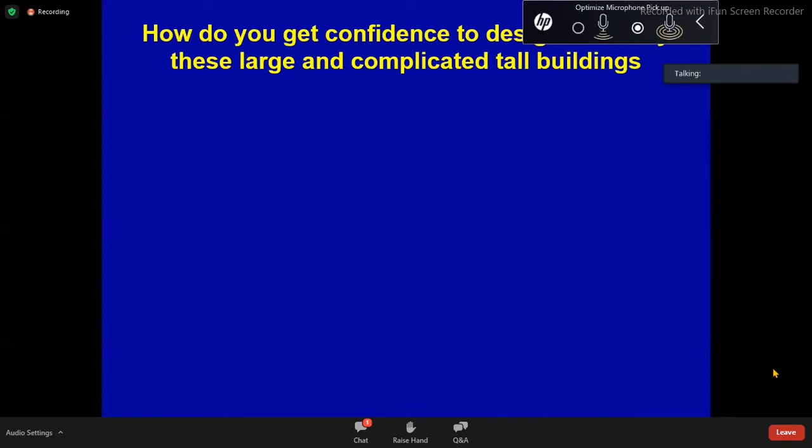And so how do you get confidence when you are designing tall buildings? Can you get confidence by just following Eurocodes or BS codes, or by developing a thorough understanding of fundamentals and theories?

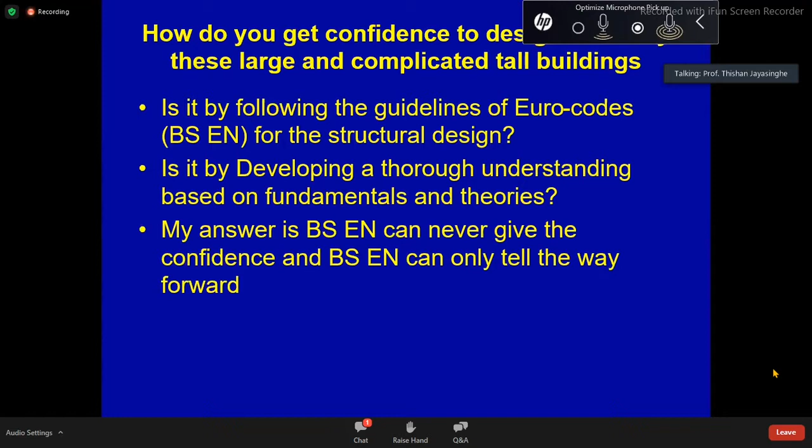The most important thing is you must develop a thorough understanding. Codes will help you, but they will never give you the confidence to sign and certify a tall building, especially very special shaped buildings like Altair. So if you want to certify, you must be thorough with your fundamentals, and that's why we always encourage our students to learn the fundamentals and then applications, rather than going directly into applications.

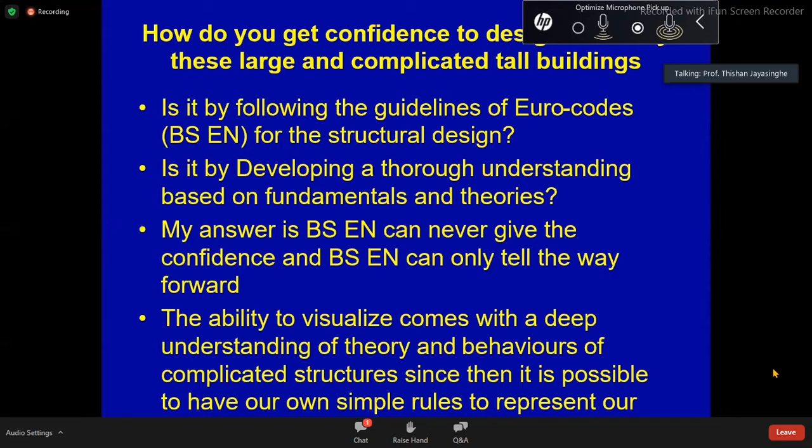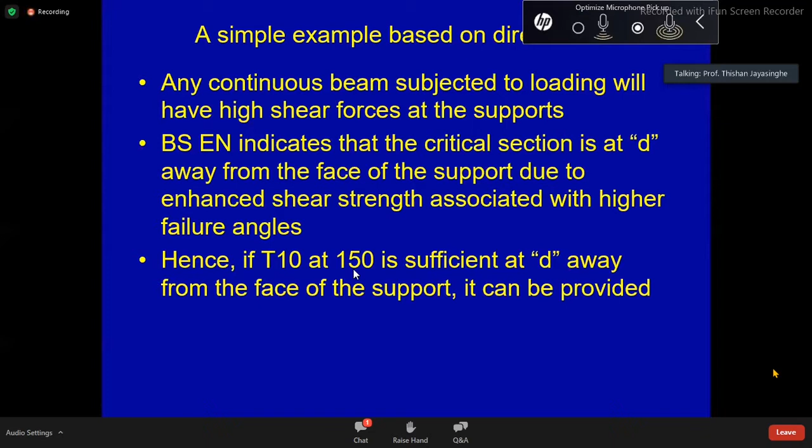I'll just take an example, and it's about direct shear. Any continuous beam subjected to uniform loading will have high shear at the supports. When you are checking for shear, the BS EN or Eurocodes allow you to check it at a distance d away from the face of the support, and then you can provide the same reinforcement up to the support. So if T10 at 150 is sufficient at a distance d away, you provide the same reinforcement within the face of the support and the depth d.

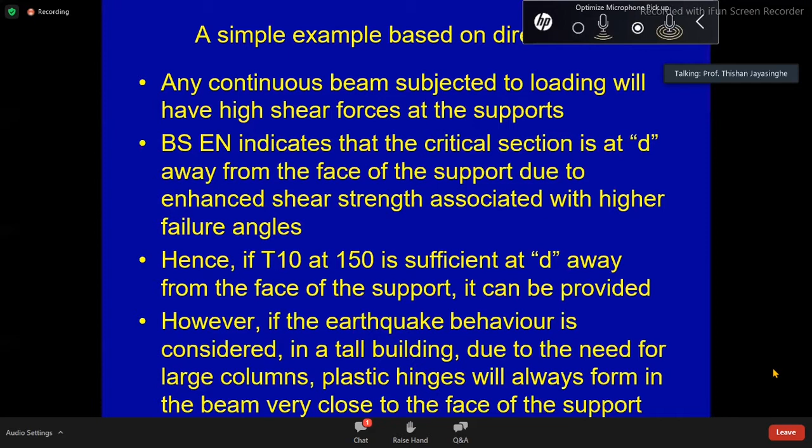But if you look at earthquake behavior, plastic hinges always occur very close to the face of the support. So if you just satisfy the rule given in Eurocode 2, you may not have a very safe building. You must look at Eurocode 8 as well, where you will look at the earthquake behavior, and then take the precautions that are given in that as well.

So basically, you have to have certain rules that have been developed by you. For example, if I am designing, I would not like to have a shear stress more than 2 newtons per millimeter square, because I know it's better to have a flexural failure than a shear failure. Flexural failure will always give us enough warning, whereas shear failure will give us less warning. So to prevent a shear failure, I know the maximum shear may be about 4.5, but if I keep the maximum shear stress less than 2 newtons per millimeter square, then the chance of shear failure is very, very remote.

Then if I am getting a high shear, I know the section I have selected is too small. That's why it's giving a shear failure. In a reinforced concrete structure, increasing the width of the beam by 50 millimeter or 100 millimeter will not carry a huge penalty. So it's worth increasing the width of the beam by 100 millimeter rather than having a very high shear stress.

So you can have various rules, and the reason is you have to always think which failure you would like to have, and then ensure that particular failure occurs in the structure when it is overloaded. And then you take additional precautions against whatever failure you would not like to have. Generally, I like beams failing in flexure because it always gives sufficient warning.

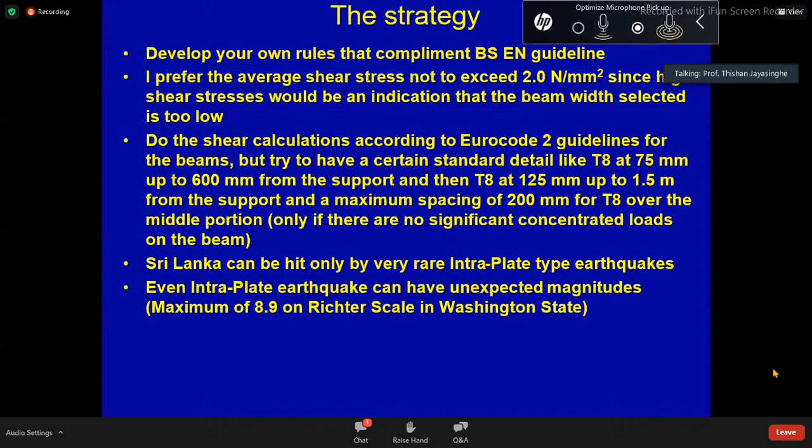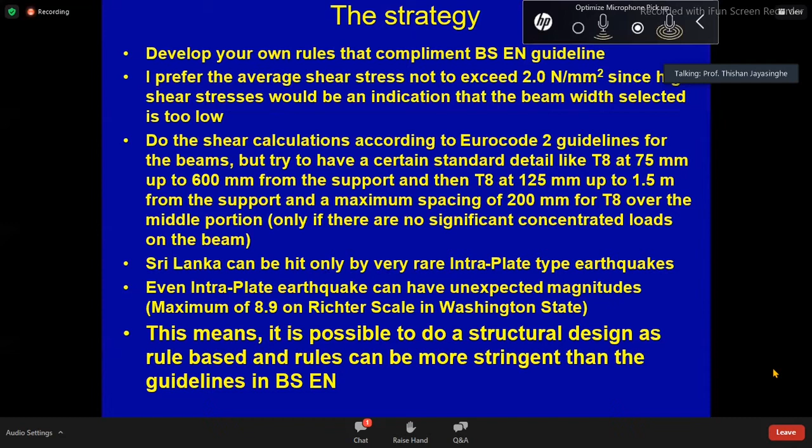So what you have to do is don't blindly follow the codes. Always develop your own rules, and then you can use codes and do the calculations. And if the answers that you get do not tally with your rules, you can always recheck. But if you do not have your own rules, then there's no way you can check and ensure that your answers are correct.

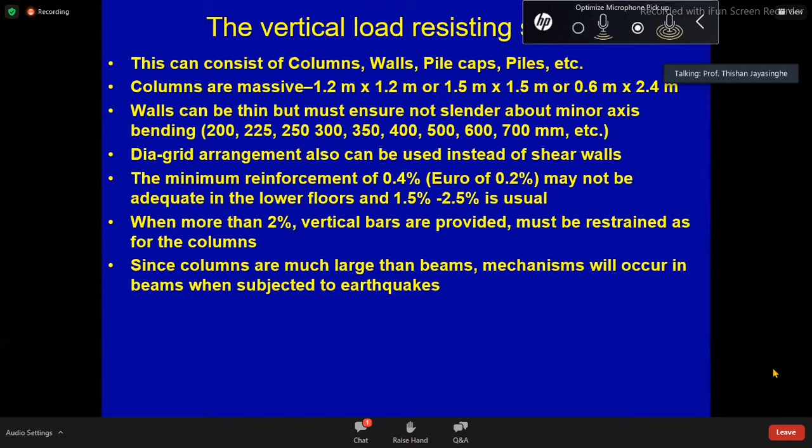So let's see some guidelines. In buildings, if you are considering the vertical load carrying system, the main vertical load carrying system consists of columns, walls, pile caps, piles, and columns can be massive, but again, we can't increase the size of the columns too much. So because of that reason, we generally tend to use higher strength concretes in columns.

And if you look at the Eurocodes, the Eurocodes allow us to use either cylinder strength or cube strength. So I'll talk only in terms of cylinder strength to avoid any confusion. We are allowed to go up to 105 newtons per millimeter squared or megapascal as the maximum strength. Whereas, in most of the constructions, you will find that we are using 25 or 30 megapascal concrete.

And then walls can be of any thickness. And as an alternative, if you want, you can use diagrids. And the minimum reinforcement requirement on columns and walls according to Eurocode is 0.2%, BS code is 0.4%, but it's very usual to find that you are getting about 1.5 to 2.5% reinforcement.

And when you are using a column of something like 1.2 meter by 1.2 meter, and when you are using some concrete like 100 megapascal, it's very usual to have massive column loads, like 80,000 or 90,000 kilonewtons, or 9,000 tons. And you can just imagine the weight of a vehicle, a container truck or a cement lorry carrying 600 bags of cement, will have a total weight of only 40 tons. And here we are considering a column carrying a load of something like 80,000, 90,000 kilonewtons.

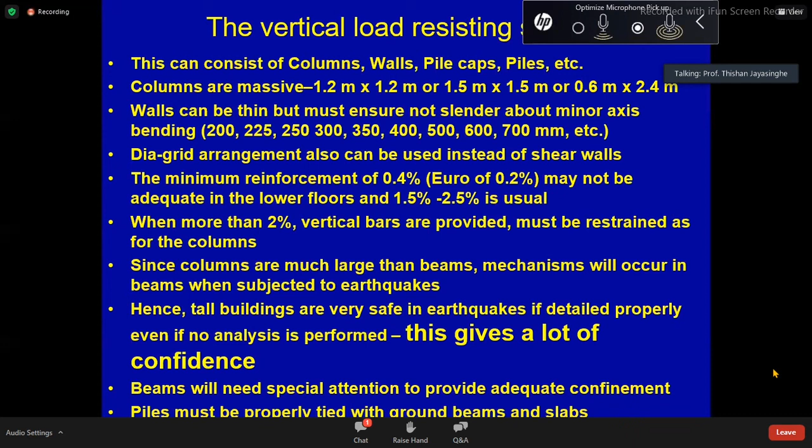And once you have this kind of knowledge, where you look at it in a more objective manner rather than just as a mathematician, it will give you a lot of confidence that your structures are good and correct. And you have to take adequate precautions when you are having columns, beams, piles, and especially the ground beams and so on.